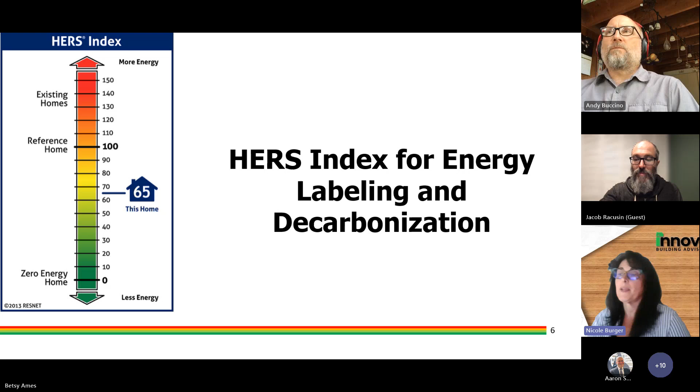So in addition to assisting renters and home buyers, a HERS rating is a valuable tool to identify and address disparities, helping to identify neighborhoods and communities with a disproportionate number of energy inefficient homes.

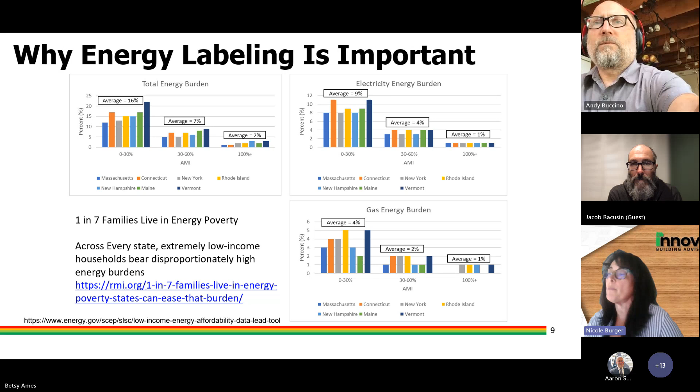So why energy labeling is important. RMI's research reveals a significant energy burden on low-income households. These households spend a disproportionately high percentage of their income on energy compared to higher income families. This financial strain forces many to make difficult decisions, such as reducing food or medicine purchases or even enduring unsafe temperatures. Addressing this issue requires immediate action to prevent energy poverty. The current scenario demands action to bridge the gap in energy affordability by acknowledging the disproportionate burden faced by low-income households and implementing effective measures. We can work towards a future where essential energy needs are met without pushing individuals into a state of energy poverty.

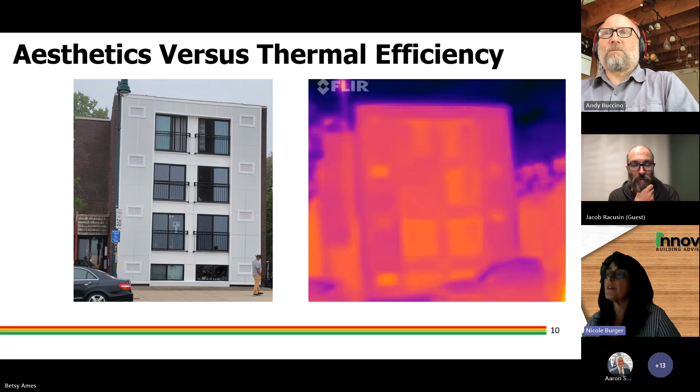So other reasons for energy labeling, right? Things aren't always what they seem. It's a nice facade. What's hiding under that facade? Probably, most likely high utility bills, uncomfortable drafty rooms, poor indoor air quality. So we all know that HERS ratings can show what can't be seen.

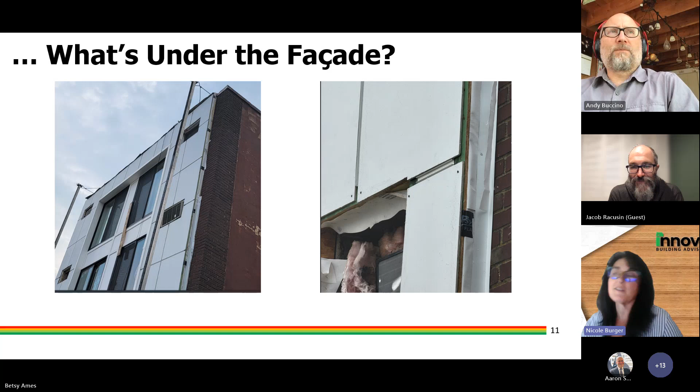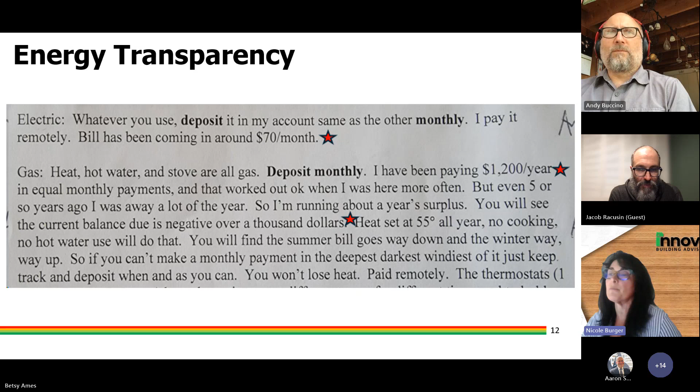As you can see, my bill didn't really line up with what was being said, but I'm not surprised because the house was drafty and uncomfortable. And I guess the bottom line is, we shouldn't solely rely upon utility bills for providing us with the energy transparency that we should be provided.

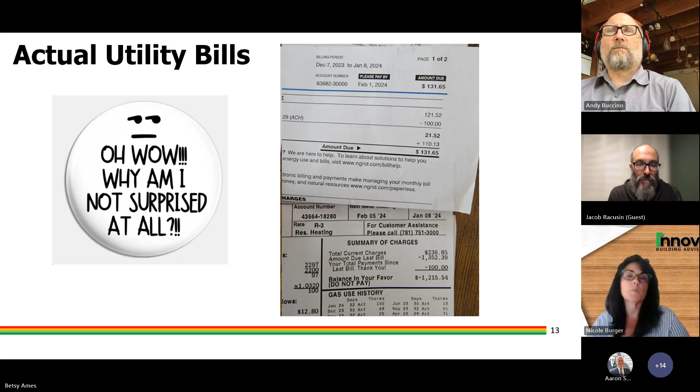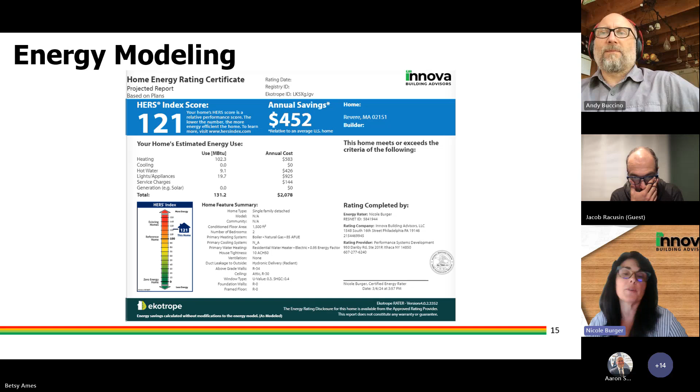Soaring energy prices are placing a heavy financial burden on many renters. The overwhelming demand for assistance programs highlights the growing need for support in this area. This situation raises concerns about whether historic limitations on energy efficiency upgrades in change of use buildings are inadvertently shifting the financial burden onto tenants. Moving forward, how can we ensure a more equitable approach to energy costs for tenants, considering both energy assistance programs and potential upgrades to improve building efficiency?

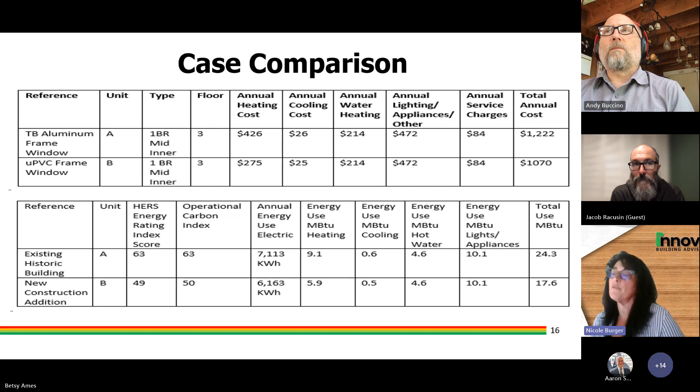The Inflation Reduction Act and HERS ratings are directly linked through the Act's focus on energy efficiency. HERS ratings are required for consumer protection, providing homeowners a clear understanding of a home's energy performance, helping them to make informed decisions. So energy labeling homes and rentals is a critical step towards creating a more just and equitable society.

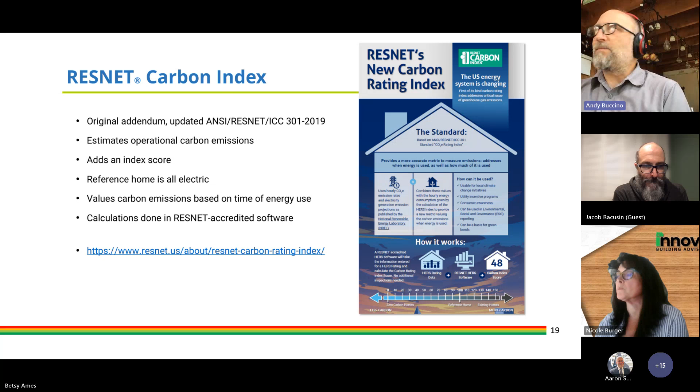So with the CO2 index and standard 1550, which is the embodied carbon standard in development now, Jake will discuss that. We're now able to leverage what we're calling the RESNET Trifecta: operational, the CO2 index, and an embodied carbon standard, and consider a whole building life cycle analysis. And we'll soon be able to do that for both new and existing buildings.

So 4 short years later, which seems like 2 decades or 1 month, depending on how you look at it, we are now doing a 100 home study in Massachusetts using Ecotrope and leveraging it with Beam software, which Jacob helped to develop also. Next slide, please.

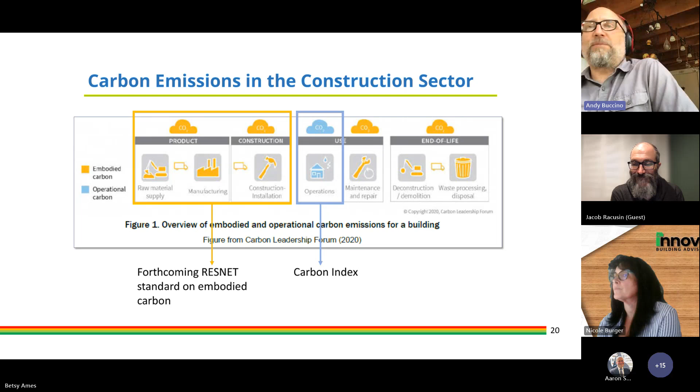As I'll show, the CO2 index takes advantage of the NREL Cambium database. It leverages calculations of the HERS rating process and the HERS index, which calculates operational carbon. It also accounts for site combustion equipment. It tracks those emissions at the point of install. So this gives us a full picture of carbon emissions from the building's operational use.

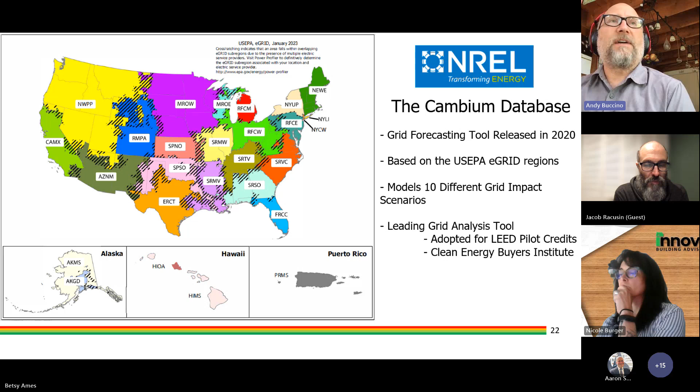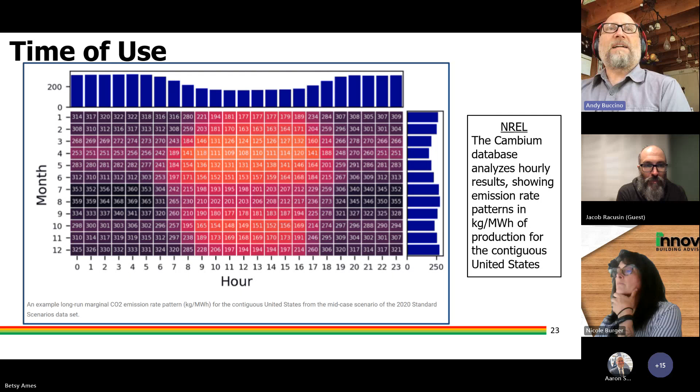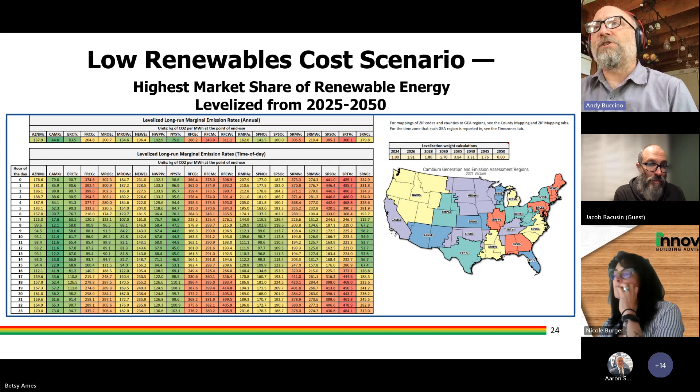The CO2 index uses this low renewables cost scenario. This is done because it's got the highest market share of renewable energy, as we see just an explosion of renewable energy in the marketplace. And this is also levelized over 25 years, from 2025 to 2050. And this was chosen because it tracks with the trend of renewable energy penetration in the global market. Next.

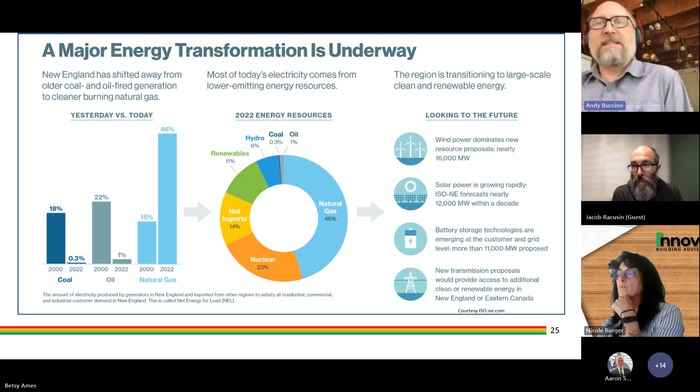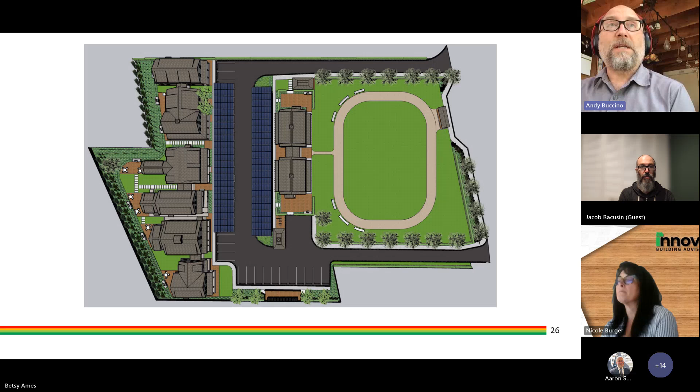So I'd already HERS modeled all of this. And the nice thing about the CO2 index is it's a natural byproduct of the HERS index that we've already done the work on. So it's a simple report. So I took all 22 units and put them through the CO2 index. And I also ran an embodied carbon study of them using the BEAM tool. Next slide, please, Betsy.

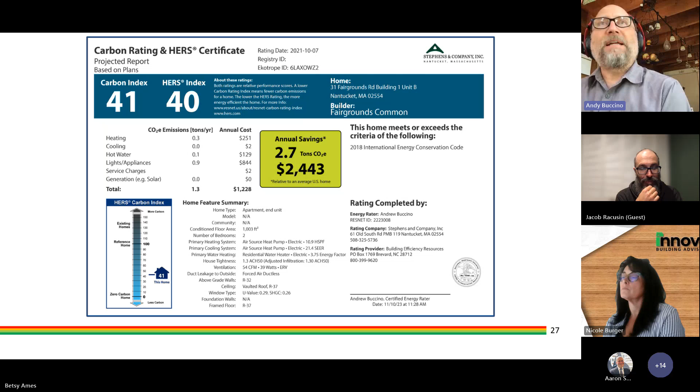This is one unit, one of the 22. What's interesting is you'll see a carbon index score of 41 next to a HERS index score of 40. The CO2 index uses an electric building as its baseline. So this is in close alignment with a HERS 40 by default for that reason. Next slide, please.

So I took all 22 units and I ran them through the CO2 index. I wanted to understand what would happen if I move them from one region to the next, from one grid to the next. And I chose these three because of their varying intensities. New York State, you'll see, is really green there on the left. New England in the middle is kind of average in the big picture for the United States. And Ohio, Southern Ohio there, is pretty intense. It's got a lot of coal there.

So I took each of those regions and ran all the models through there to discover what kind of impact the different grid would have on the exact same building with all the exact equipment, same insulation values. Next slide, please.

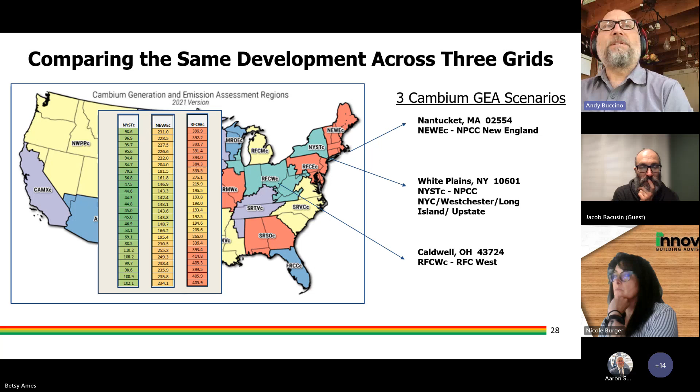And we got some pretty interesting results. Ohio is the most intensive, so 1,200 tons of CO2 over 25 years operationally from that grid. And then New England was about 800 tons, and New York was just over 600 tons of CO2 emitted or equivalent. It's a really interesting dynamic. Makes us consider how are these buildings performing and what can we do to improve that if we're just looking at operational intensity on the grid. Next slide, please.

So as I pointed out, we also have solar, and we sized the solar equivalently to the anticipated consumption in the HERS model. So we sought to zero out or net zero operationally what this development would do. This is a single unit that you're looking at on this slide, in that above chart. You'll see 0.34 tons of CO2 equivalent. That's even though it's been zeroed out operationally with solar.

And the reason for that is because the solar doesn't work at night. So we've got this residual grid intensity that's being picked up in the overnight hours. And in New England's case, and in most examples, that's picked up by natural gas or some other fossil fuel. So we still have this residual intensity around that piece. Next.

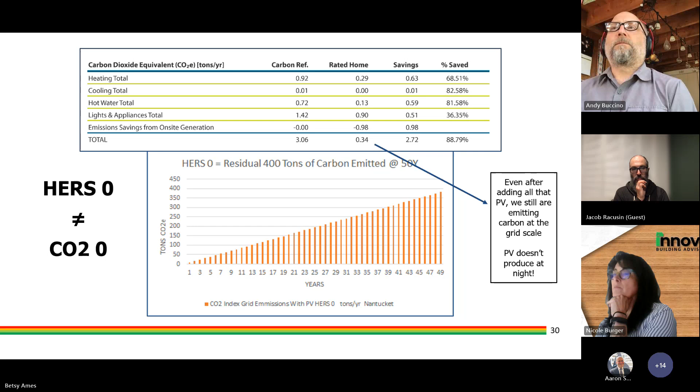To be clear, just to be transparent, we did not quantify the amount of steel ballast that was included to make the parking structure or the PV panels themselves. Jacob may discuss this later, but some of Jacob's work acknowledges the kilograms of CO2e per watt, or per panel, excuse me. Next slide, please.

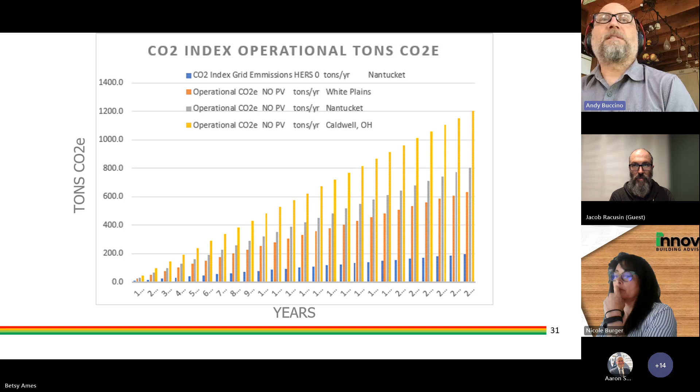And so the reason those residual loads are important is because we've got peaker plants that will be there for the foreseeable future to pick up these residual loads when the grid is most intense and demand is highest. And these are disproportionately located in areas with a large percentage of people of color and low-income residents. So by acknowledging the CO2 index and the work that happens in that model, we could start to acknowledge those loads, limit them, transition those loads through different renewables. Next slide, please.

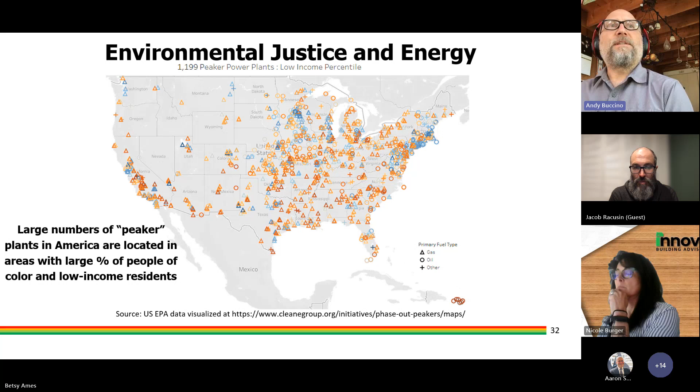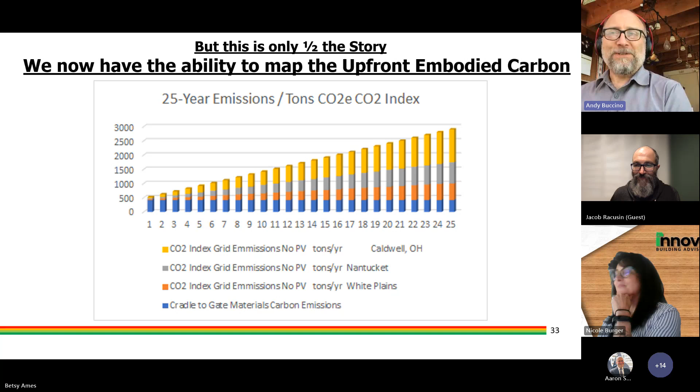And so now we get an awful lot of information from the CO2 index and from the HERS index. And we have the ability to map upfront carbon, embodied carbon as well, which Jacob will speak to. What happens when we can paint the same kind of picture for materials production? Are there existing mechanisms that can help to disrupt materials emissions at the extraction point, in transportation, or at the production facility? I'm really happy to introduce Jacob, who's been working on this exact problem for many, many years. And he's widely considered a leader in this market. So thank you, Jacob.

Thanks, Andy. All right, so let's pick up the material side and talk about the embodied carbon part of the picture. Just to give a little bit of context here, I'm going to assume that we're not all nearly as familiar with this concept as we are with the world of energy. So I'm going to give a little bit of introduction around some of the terminology and frame the conversation around material emissions and embodied carbon, and then show how it relates back to this larger picture of a building's total carbon impact.

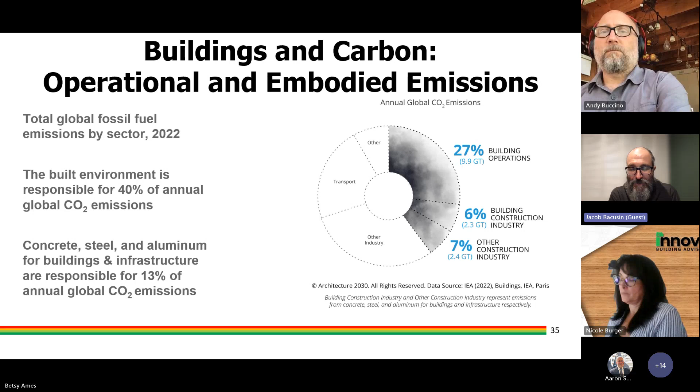So what does that mean for those of us in the residential space? Well, if we take an average emission of 200 kilos of carbon dioxide equivalent, and I'm going to pause for a second to define this term, the CO2e, you can see on that little left-hand arrow there, the E stands for equivalent. So we're looking at all greenhouse gases normalized to their equivalent impact per molecule of carbon dioxide. For example, over a 100-year period of time, methane has roughly 25 to 30 times the impact of a molecule of carbon dioxide. So its CO2e value would be 25.

So we've done some studies to look at what the average emissions are for residential construction in North America. If you were to multiply those emissions out, and this is just for the materials, so the emissions released in developing the materials for those homes, by the amount of new low-rise residential construction in 2017, mind you, this is 7 years ago, the emissions from those materials are equal to or greater than the entire national emissions of many developed countries. So when you look at it on a residence by residence basis, it may seem small, but with the rate of construction, that is just a phenomenal amount of carbon emissions that we have the opportunity to address and reduce. So again, just giving you a point of reference on scale here. Next, please.

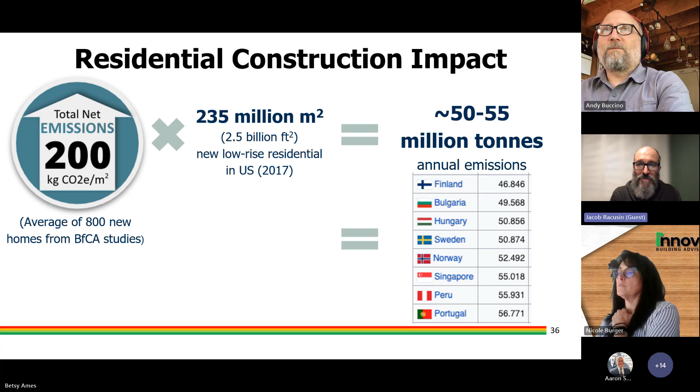So just to give you a sense of where that number came from, this also peeks behind the veil of some of the research we've been doing in this space. You'll see the link below for Builders for Climate Action. I do quite a lot of work with this fantastic organization that does a lot of this research and is also developer of a tool, which I'll discuss in a moment. You can see the range of emissions from benchmarking studies we conducted in a number of regions, primarily in Canada.

This is looking in Toronto, and that 200 number continues to surface as a rough average. Just to give a sense, that's looking at about 500 homes. We've looked at about 800 or so homes across multiple different municipalities, and these numbers track somewhat comparably. More of that research is starting to happen now here in the US. We'll talk a little more about that in just a minute.

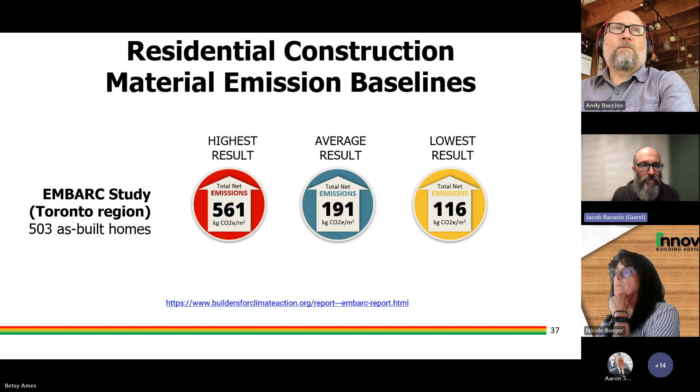I'm going to state the obvious here, but do it with numbers so that it's quantified, giving data to back up a pretty obvious pattern: if we're trying to build low emission, low carbon buildings, we need to not only reduce the energy load and the carbon emissions coming from that energy, but also the emissions that are coming from the materials it takes to build these buildings.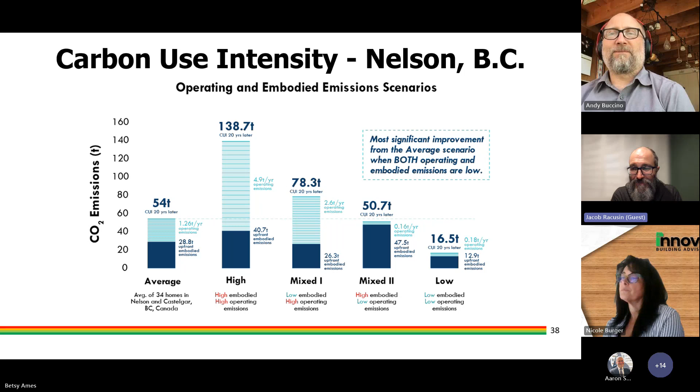All right, next please. Looking at that visually, my background is as an energy nerd, energy modeler, a high performance builder—that's the space I came from. For a really long time, our whole response to dealing with the climate crisis was through reducing energy, and that is still absolutely critical. Load reduction: necessary, foundational, fundamental. It's just not, we can't stop there. It's necessary but insufficient.

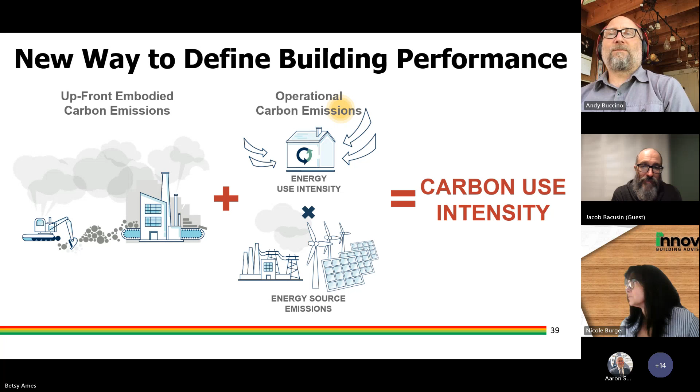A bunch of different words all describing the same thing: essentially the carbon footprint that our buildings carry into its operational life. So if you're thinking of the building's life beginning when you turn the keys over and it starts occupancy, I would say no. From a climate standpoint, the beginning of its life starts when you are literally harvesting the raw materials out of the ground or out of the forest.

What's also important to note is that if we're trying to meet carbon reduction goals within the next 5 to 15 years, it is those upfront emissions that are the lion's share, the vast majority of the emissions our buildings are releasing coming from those materials within this near term. The buildings start their life with this plume of emissions coming from the materials. So if we're trying to meet near-term emission reduction goals, we have to address that time boundary of when the carbon is being released. That is the time value of embodied carbon.

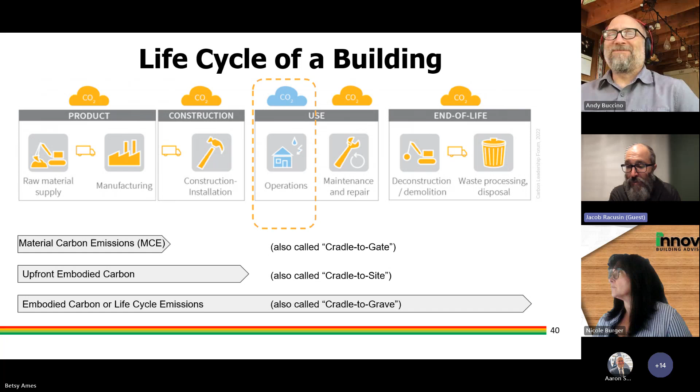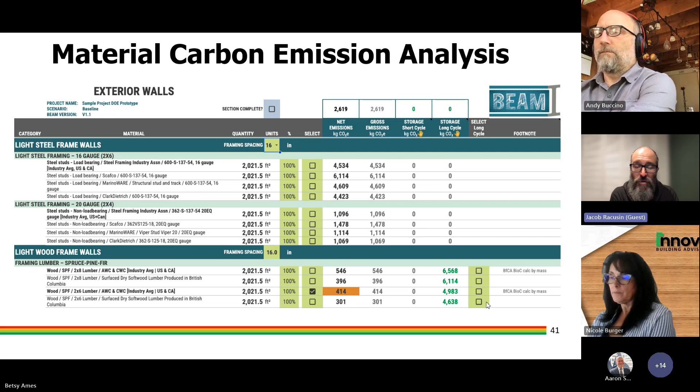So that just gives a really quick view of a simple-to-use design aid and accounting tool for tracking the emissions of many thousands of different materials. The data sources are the environmental product declarations - essentially the environmental nutritional labels, if you will - of all these different products. These are disclosed by the manufacturers or their trade associations for their own products, and we're simply aggregating those EPDs and putting the data into a really easy to see and easy to use tool to help make better design decisions.

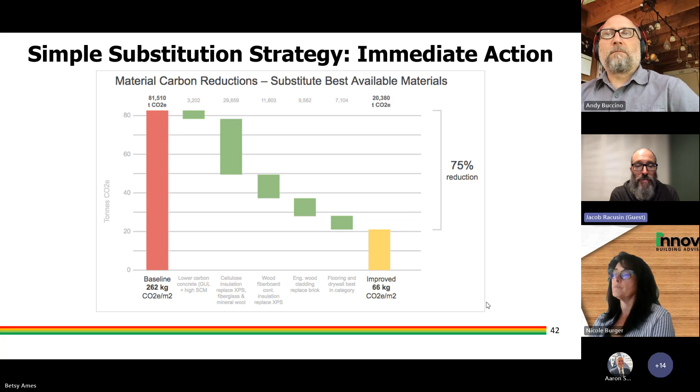All right, so actually I'm going to keep going, but we're going to move on to the next and final section here - or maybe next to final section. Look out, section 4, looking at some of the emergent methodologies here. So kind of wrapping this all together, tying this all together.

There are now over 4 million homes in the RESNET program going through the HERS Index. This is a scalable approach as we look at what it means to leverage this work across a large number of projects. We're doing a great job as an industry evaluating and reducing the energy emissions, energy consumption, and energy loads of our buildings. Now, looking at the CO2 index, right now we have time-of-use accurate emissions for those energy loads our buildings are using, coordinated closely with the HERS index. That was great - Andy was showing us what it looks like to have a HERS and a CO2 index side by side to help communicate and evaluate what those emissions mean.

So what's coming up right now on the embodied carbon side is standard 1550, an embodied carbon standard within the RESNET program that is currently under development. I'm going to talk about that for just a couple of slides now.

So right now, the goal of the standard - to formally define it - is to develop a standardized method to calculate and report the embodied carbon impact of homes. The intention here is, not unlike the way Andy described the CO2 index scaffolding onto the HERS index to take that energy metric and turn it into an emission metric, we're looking to bring embodied carbon as another metric that a rater can evaluate in a standard rating process, to work alongside the HERS and CO2 index reporting. So that is the goal here.

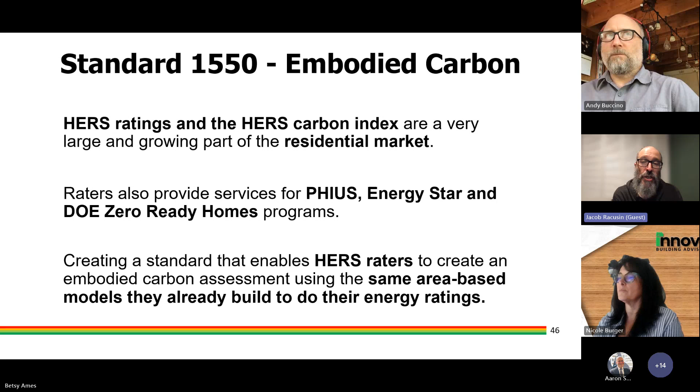The last thing I'm going to talk about is very emergent, and I get very excited about it—I know this tends to be a technologically literate community. We're doing really exciting research around the embodied carbon of mechanical, electrical, and plumbing services. This area has largely been absent from embodied carbon calculations because we simply didn't have the data. Now we have more of that data, and since we're trying to coordinate this work within an energy framework, it's relevant to look at the equipment consuming a lot of this energy.

So we're really excited to look at this. I've been doing a bunch of research in this field, and there are a couple of really big, exciting takeaways. Refrigerant leakage is the dominant source of the global warming impact of these high greenhouse, high global warming potential refrigerants—their leakage is the dominant source of emissions across this category of materials. As we continue to electrify our buildings and migrate further toward refrigerant-based systems, this is really important for us to pay attention to.

That's one very good example of the relationship between our energy systems, energy consumption, and embodied carbon. But there are other take-home points: the amount of ductwork and metal we're consuming really makes a difference, so efficient buildings lead to efficient ductwork systems, which lead to lower embodied carbon. Similarly with overall equipment, the heavier and more intensive equipment needed to service larger loads means more upfront emissions from putting that equipment into our buildings. So efficiency pays again and again and again.

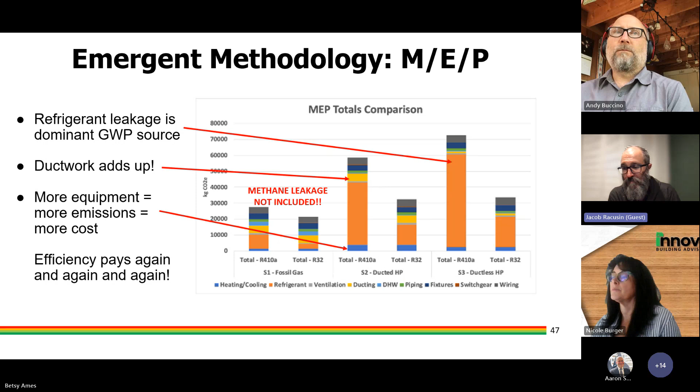My turn. I'm going to dive in.

First of all, I did not recognize that dandelion fluff had an R value. So I'm going to be cultivating that out of my backyard—I'm loaded with dandelions right now. As an Italian American, I love eating dandelion greens, and now I can insulate too. Thank you, Jacob, it's good—we're checking a lot of boxes here today. All the boxes.

We're doing a 100-home study, as I mentioned earlier, and Jacob just moved from the slide around MEP, which is an emergent methodology now recognized in the standard—Jacob's work is now integral to it. In our 100-home study, that was kind of a sidebar, but I wanted to let this group know we were just funded to include MEP carbon, or materials carbon, in our 100-home study. So it's a big deal for us.

We're really excited—we're launching the study in about 6 weeks. We'll start running it through an integrated software between Ekotrope and Beam, which we've been working very diligently on with Jacob's help, along with a pretty ninja group of guerrilla warfare people who are just crushing it. It's really exciting.

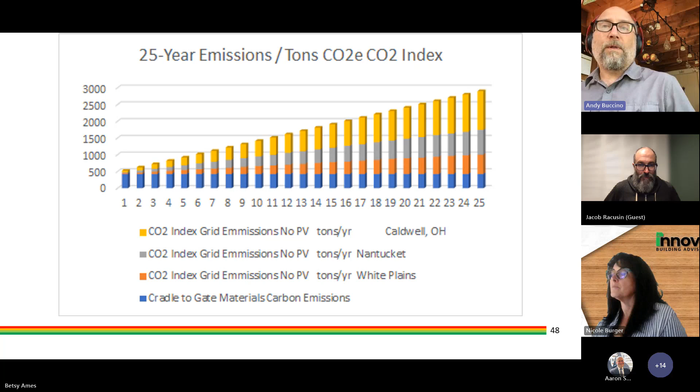Next slide, please, Betsy. One of the opportunities we have doing the 100-home study is we have a really good budget for doing some reporting. This is not that, to be clear. This is my kind of Crayola take on what some reasonable reporting could look like.

The blue is the embodied carbon again, and this is the White Plains grid. So New York, super efficient compared to the other two. And you see how impactful the embodied carbon emissions are of the materials. It takes 17 years for these lines to cross. So that orange line is the incremental operational emissions from the grid over 17 years before it actually matches. So if we're looking at 2030 goals, 2035 goals, 2050 goals, you really see how impactful this upfront materials carbon can be in the overall picture.

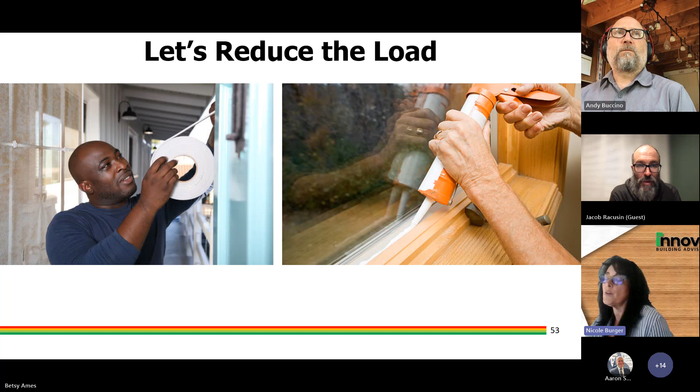Next, please. So reducing the load, one obvious step is to tighten our existing buildings.

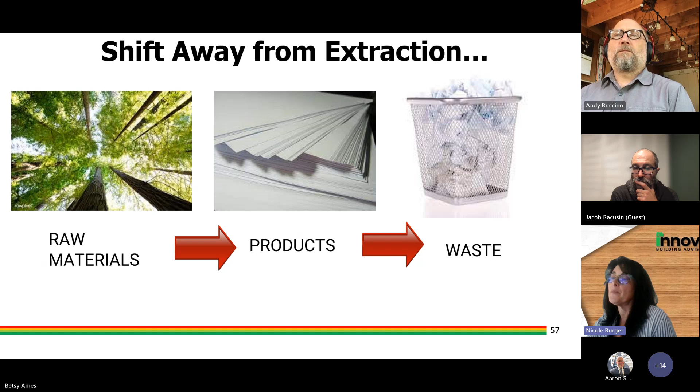Next, please. And despite the fact that indigenous populations, which comprise about 5% of the world's entire population, are the ones who have managed to preserve as much as 80% of the world's biodiversity, we're being asked to stop externalizing the cost, but what does that actually mean? Next, please. So part of the answer has to do with moving away from the linear process of extraction.

Next, please. And begin to find ways to bend the line and close the loop by incorporating regenerative principles into our buildings, neighborhoods, and communities. Next, please. And this is where folks like Jacob are developing systems which start to have synergistic effects, where waste products from agriculture, such as straw, or lumber yards like wood chips, are diverted from the landfill and are used to create straw panels or fiberboard as insulation for homes.

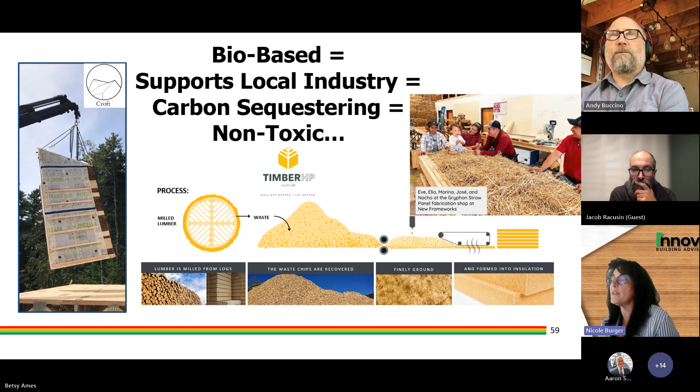These products are bio-based and therefore reduce the embodied carbon footprint of the building because they sequester carbon. They also reduce the operational emissions by reducing the heating and cooling load, which also reduces the load on the grid, especially as we move towards electrification. They support local industries by creating new markets and jobs, and the building components themselves are non-toxic, making the indoor air quality far better for occupants, and it's a win-win-win for everybody.

Next, please. So we're standing at quite possibly the most important crossroads in human history, where we get to decide if we will stick to familiar pathways of extraction and depletion or step forward into something new, into a world of abundance. Through the trifecta, we now have the opportunity to manage the operational, grid, and embodied impact of our buildings, which will result in both reducing the likelihood of climate-caused catastrophe as well as enhancing our building's ability to

weather those events, all of which helps reduce the impact of previously externalized costs, both at home and abroad, and helps shift us in a new direction towards regeneration and resiliency. We're honored to be part of figuring this out. Thank you.

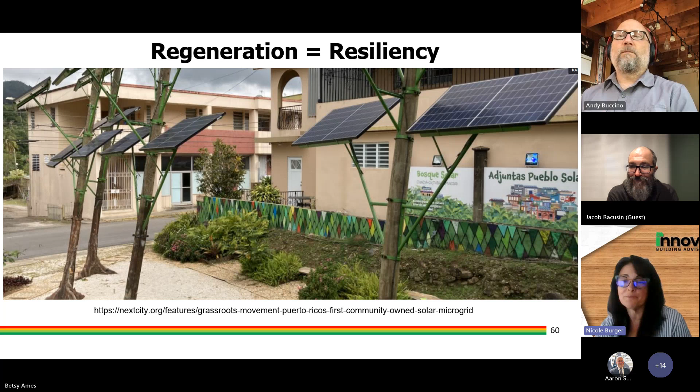Great. Thanks so much to our panel. Maybe the first question, we've got a group of raters on: it seems like the raters are the natural people to do these additional certifications for builders. That being said, what would the added cost be for a builder who's currently doing a HERS score, maybe doing Zero Energy Ready Home, the Mass Save program, something like that, to add on these additional certifications for a house that they're building? Or do we not know yet? Is it too early?

No, it's not. That's been a real driver behind the development of Standard 1550. And so looking at what those extra lifts are has actually been part of my team's responsibility on the technical committee. And also, we had the fortune of doing the 100 home study development simultaneously as 1550 was being evolved. So I've trained a few raters already in this integration and recognized what we already do as raters, and what the extra lifts are.

And the goal is to simplify so that the outputs can be nearly as clean as the CO2 index. So the CO2 index is just a report. So as Jacob said, we're trying to capture 80 to 85%, and it might be 70 in many examples. There is going to be a workflow lift. What we're discovering already in early tests is that it could be anywhere from 30 minutes extra to an hour and a half to 2, depending on the complexities of the job.